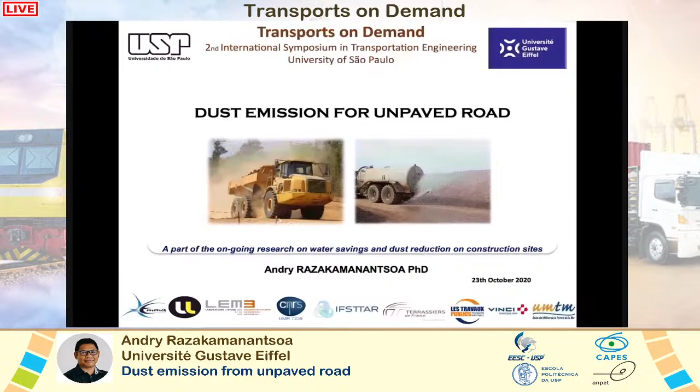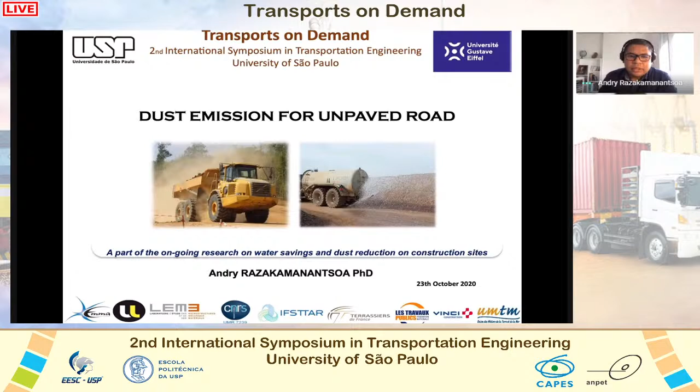As presented by Anna previously, I'm Andry Razakamanantsoa, a researcher in the laboratory team Geomaterials and Environmental Interactions of Université Gustave Eiffel. To begin my presentation, I would like to tell you shortly about our laboratory, and after I will come back to the topic, which is the subject of this presentation.

Our main topics are around earthworks, durability of earthen structure, and the interaction with the environment. In the context of global warming, the main question that we try to solve is about resource saving by using knowledge in terms of engineering geotechnics around the application, which is cities and territories.

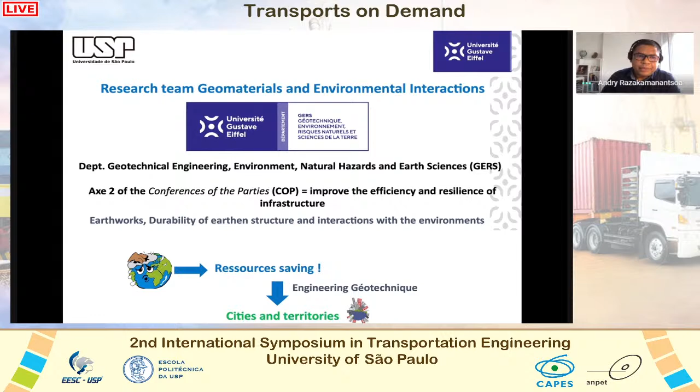The main topics of research of our laboratory are focused on interactions in geomaterials, where we try to develop new binders and to reuse materials, mineral and organic. With these aspects, we use porous media and coupling hydromechanical and chemical mechanisms as methods of study. About interactions of geomaterials with environment, we work mainly on geomaterials submitted to hydromechanical stress, and also interaction with atmosphere. For that, we use multiphysics coupling, solid mechanics, and fluid mechanics.

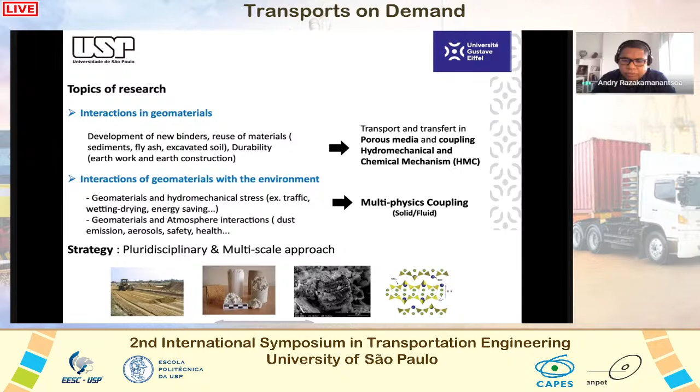Our strategy is that the main topics of research are studied using a pluridisciplinary and multi-scale approach, from molecular to field scale. Let's go back to the topic. I want to talk with you today about a part of the study that we have performed on the problematics related to dust emission. The first part of the presentation, which I will talk about for some minutes, is related to the geotechnical aspects of the dust emission and the link with the unpaved road.

The main context is about the need in the field. If we talk about earthwork applications, professional activities require the use of an important volume of water for different parts of the activities. But the activity which uses the main and most important water is dedicated to dust inhibition. Why dust inhibition? Because it can cause risk to the security and safety of workers during the activities.

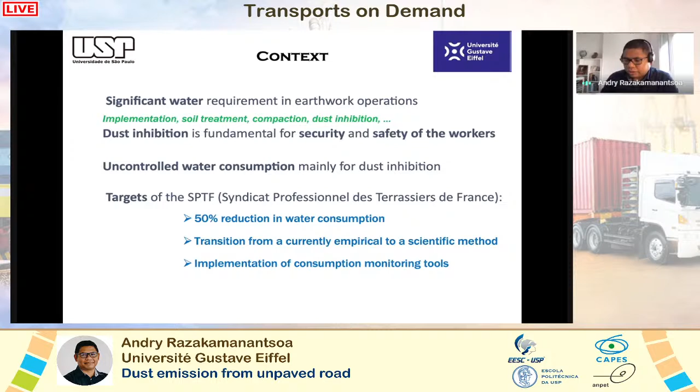But nowadays, the quantity of water used in the field is not controlled, and the target is to try to reduce water consumption and to use a scientific approach to develop different tools that can be provided to the profession. Many actions have been done and carried out by professionals in earthworks, but although all of these actions are good and interesting, they are not sufficient enough to reduce water consumption.

For example, consider 1 liter per cubic meter of moved soil. If we consider that we have 60 cubic meters per day for a current earthworks activity, then you can imagine the quantity of water consumed. But this is just an example. From now, there is no tool to help professionals in earthwork activities to control the use of water.

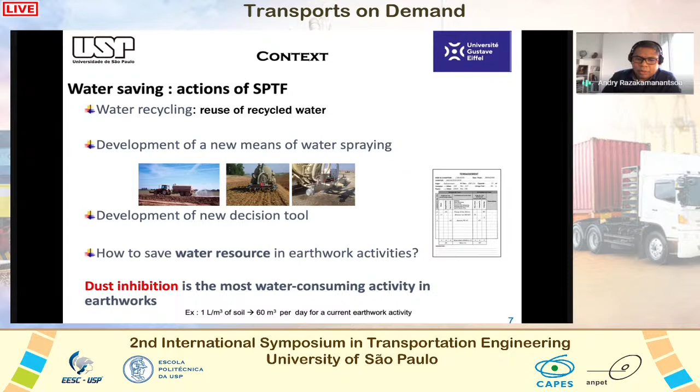So the problem is about dust inhibition. I would like to talk a little bit about the state of the art related to dust, because if we take into account the geotechnical definition, we don't have dust, but we can consider fine particles less than 80 micrometers that can be collected from the surface of soil. So if we consider this as dust, it can be produced during transport, traffic, mixing process, or soil treatment.

In terms of regulation, in France, many regulations are dedicated to sites like quarries, but it's not well clear for earth moving and mobile sites in terms of exposure.

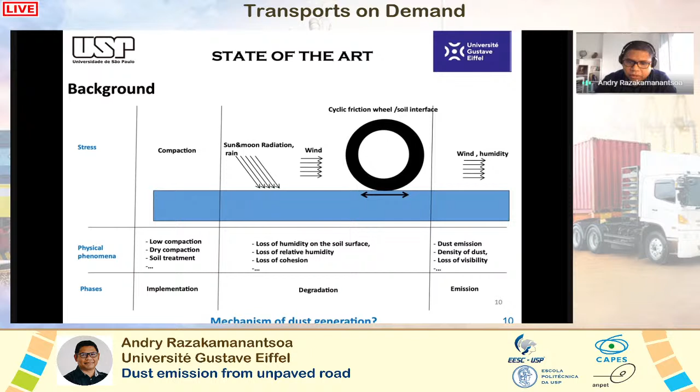If I make a kind of background about dust emission and try to identify the main sources for dust production, we can see that dust can come from compaction or from a cycle of traffic, or also due to environmental conditions like wind. But from actual knowledge, the mechanism of dust generation is not well clarified.

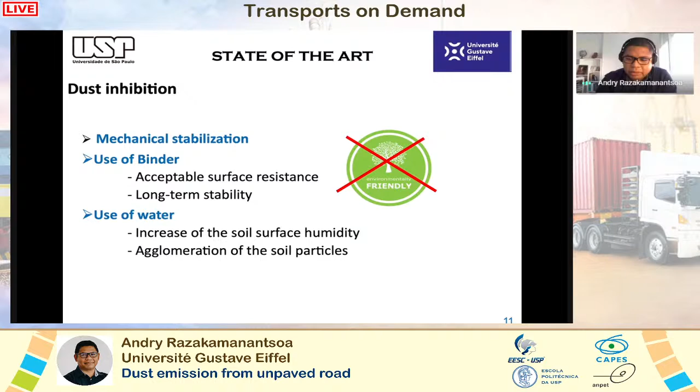How to inhibit dust emission? From now, there are many techniques, but we can summarize them in 3 points: mechanical stabilization, the use of additives like water or another chemical, or the use of binder. But the use of binder is not recommended because it's not environmentally friendly.

If I make a short summary of the main chemical products that can be used for soil treatment to reduce dust, we can see some examples considering the volume of traffic, the type of soil that can be encountered, and the climate during traffic.

We have many types of chemicals, but the problem is that they're almost not environmentally friendly, and they are also costly. So it's very expensive regarding the requirement. The cheaper option is water, but regarding the target to reduce water consumption and water resources, this also becomes a problem.

Let's talk about the scientific gap. Many scientific and technological gaps can be identified, but regarding dust emission, we have selected 3 points. The first is the reproduction of the mechanical stress governing dust generation at laboratory scale. After that, how about the dust initiation condition subjected to environmental parameters?

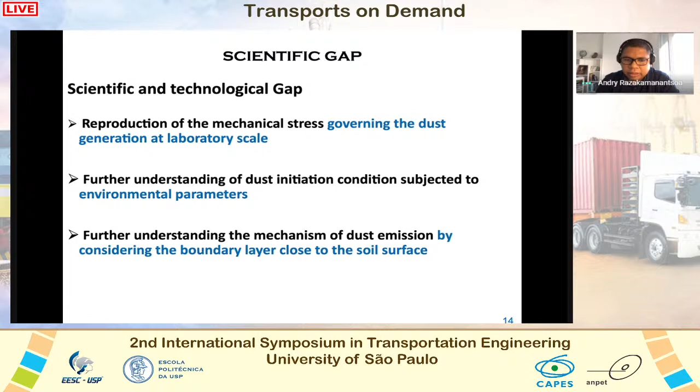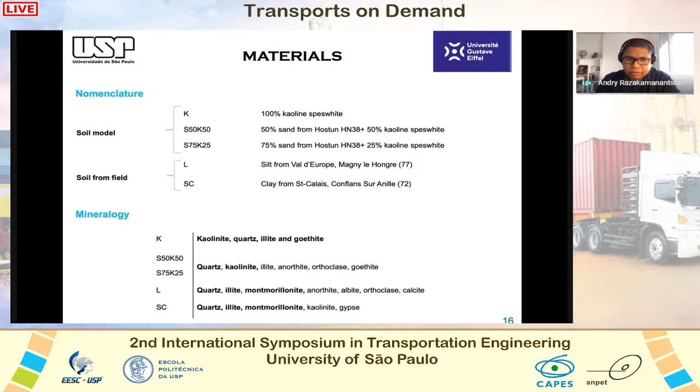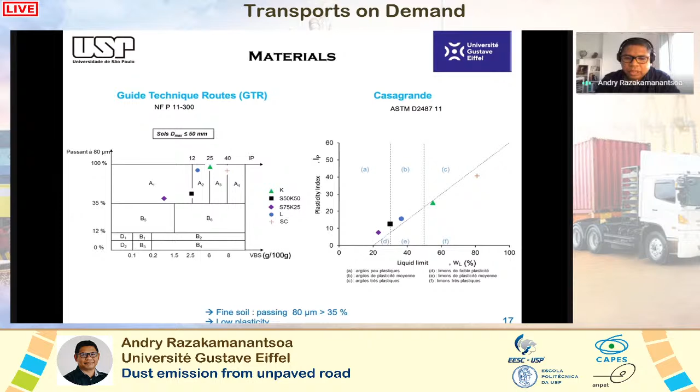The first point we try to highlight is about the source of dust generation. For that, we want to investigate a little bit the influence of stress tensor rotation provided by the roller compactor that we can encounter in the field.

From that, we will see how it's possible to apply and develop this kind of compaction at laboratory scale, and to compare it with the conventional one that we used to have in the lab.

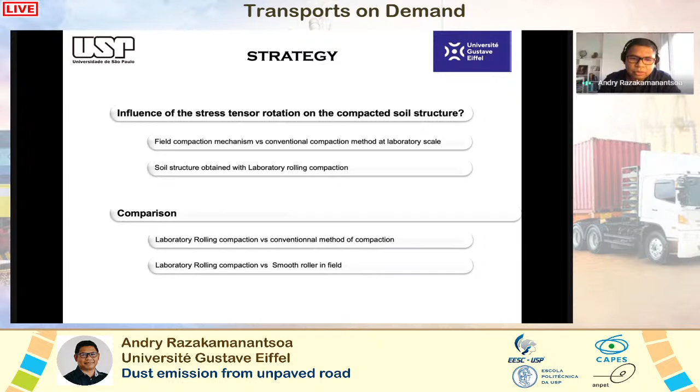As I said, when you consider a compactor, a smooth roller compactor for example, it applies a stress tensor rotation during compaction, and this enhances the settlement of the soil, giving you compaction at the end.

This stress tensor rotation is not easy to perform in the lab, because the conventional laboratory compaction you actually have is maybe with dynamic or static uniaxial compression. So the first question is how to reproduce this method, in order to understand further about the soil structure provided by this kind of compaction.

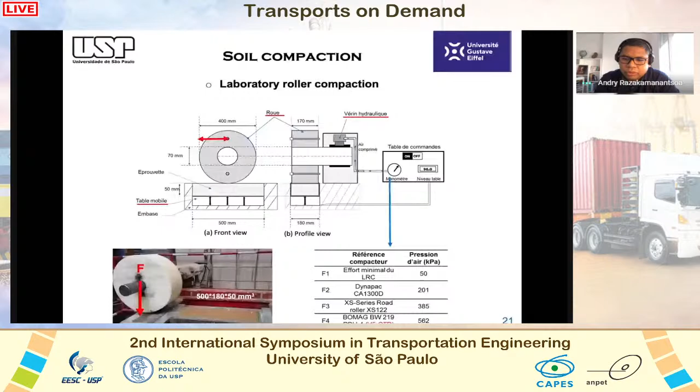So we developed a new method for our application, and we applied different levels of effort which correspond to the standard smooth roller that we can encounter in the field.

As a result, regarding the soil structure, the laboratory rolling compactor used allows us to provide a similar level of dry unit weight as the standard Proctor, but the difference occurs in terms of pore size distribution, where when we increase the compaction effort, the roller compaction allows us to decrease the macropore size around 10 micrometers, and obviously the volume of mercury that can be absorbed decreases.

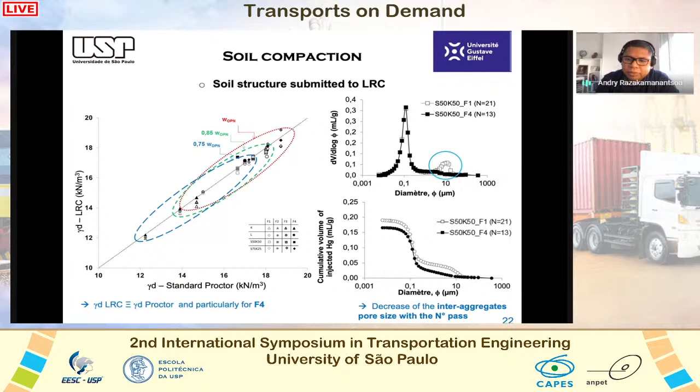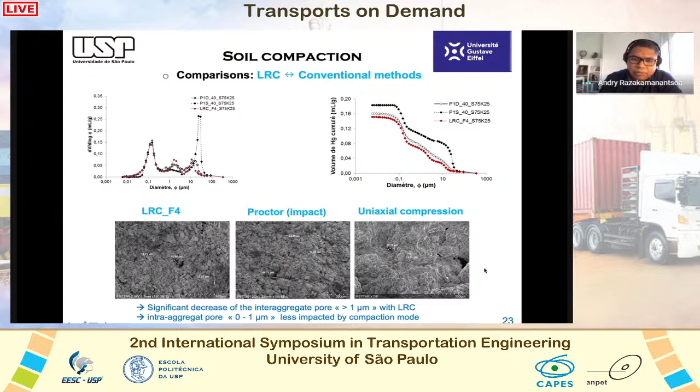If we compare the laboratory representativeness of the laboratory rolling compactor with the field, we can see on the left the pore size distribution from the same material from field and from lab, and they are similar. On the right you can see that the field smooth roller allows absorption of a higher volume of mercury, meaning we have a finer, more important pore structure in the field obtained with the field smooth roller.

If we take a look at the SEM images, we can see that effectively with a smooth roller we have a more well-organized structure, which is favorable for the development of smaller pores.

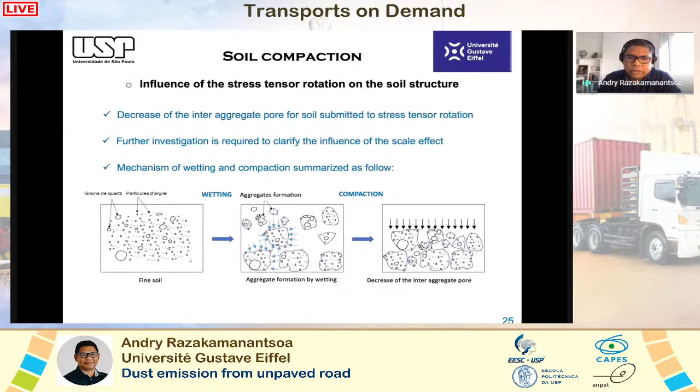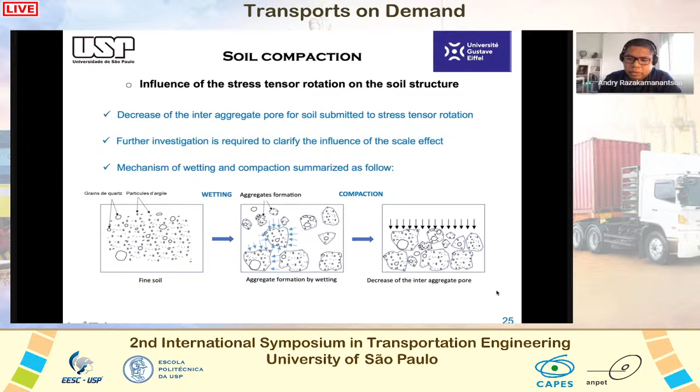To summarize what we've obtained about compaction: all types of compaction reduce interaggregate pores from soil submitted to stress tensor rotation. Another important finding is that aggregate formation is obtained during wetting, and compaction only decreases the macropore size without touching the micropore size that is inside the aggregate.

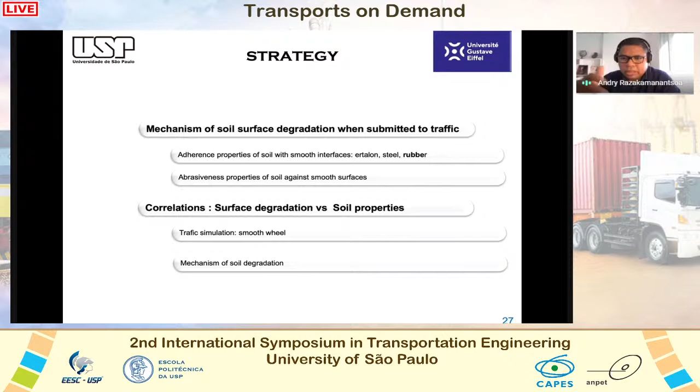Let's talk about the next step, now that we understand more about compaction: the interaction between the compacted soil and the wheel during a traffic simulation, for example. We'll talk a bit about the adherence and abrasiveness properties of soil against different types of interfaces, mainly rubber, because during traffic the soil is in permanent contact with rubber.

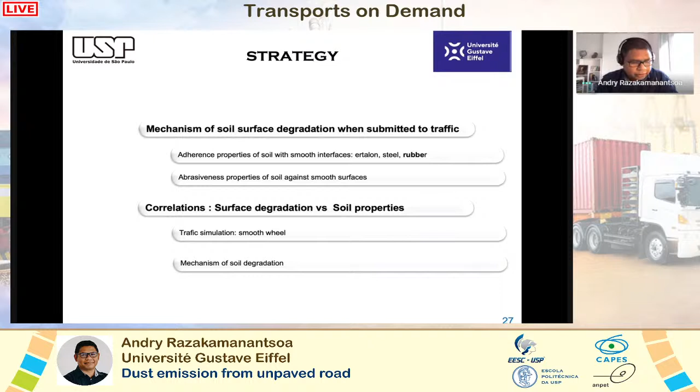After that, we will try to see if we can find a correlation between surface degradation and soil properties. Let's talk about the adherence and the abrasiveness.

For that, we did a unidirectional shear box test, and we changed the interfaces. The first model uses soil-to-soil interfaces, which commonly gives us a cohesion and a friction angle.

After that we changed the interface, using rubber, steel, and Ertalon to have different types of interfaces. What you have in terms of adherence is the ratio between the cohesion with the interface and the cohesion with soil. If the ratio is more than 1, the adherence is more important. With this type of soil, we have higher adherence.

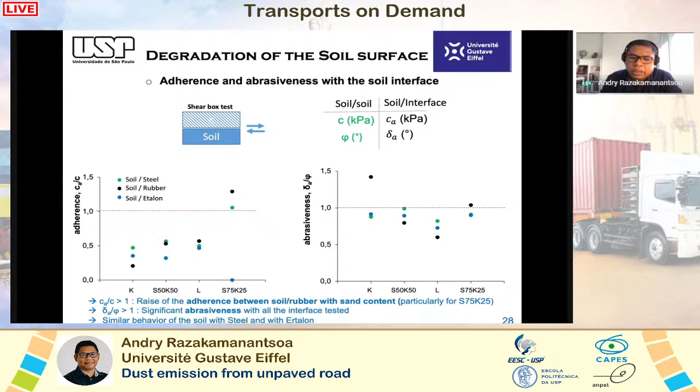If we look at the type of soil, the more we increase the sand content, the higher the adherence—that's obvious. In terms of abrasiveness, all of the soils show an abrasiveness level close to 1, meaning all configurations tested can be degraded more or less by contact with rubber.

After that, we tried to simulate a traffic cycle at laboratory scale. For that, we compacted a parallelepipedic specimen and applied different cycles with a smooth roller. We measured settlement, collected particles resulting from traffic, and performed grain size distribution analysis.

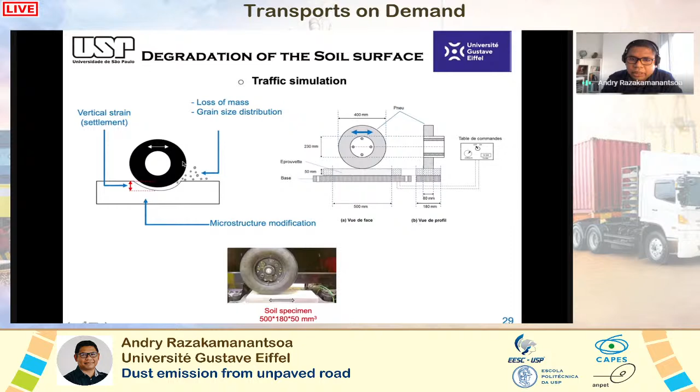We also did SEM observation. What we see is that the grains collected after a cycle of traffic are mainly composed of aggregates. Applying different series of traffic cycles, we observe that at the beginning we have a very important aggregate size, and this size decreases as the number of traffic cycles increases.

This means that the abrasion between the rubber of the wheel and the soil increases with time and number of cycles. We developed a degradation index for this.

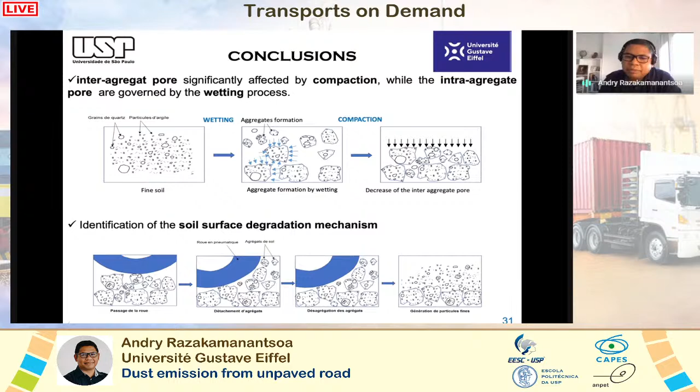As a conclusion regarding compaction: wetting allowed the creation of aggregates, and compaction allowed diminishing the space between aggregates without touching the micropores inside the aggregate. Regarding the soil surface degradation mechanism: at the beginning you segregate the surface of the soil, removing aggregates, and with time the aggregate size decreases until you have fine particles. This is the first step of the study.

What we concluded: first, we need to investigate more about the influence of wheel print on soil surface destruction, and also take into account hydromechanical properties related to soil drainage during humidification, wetting and drying paths. From now, we will also try to draft a technical guide regarding implementation and soil degradation to help professionals in terms of water saving.

So in the overall view, this study, the following steps of the study is to try to take into account the problem of health, which is linked in terms of PM, particle matter emission, and to try to prevent some health problems related to dust emission.

So this project is ongoing since it began in 2012 until now. We have had 2 PhD students and several masters students. We have international patents and scientific papers, and a guide in preparation.

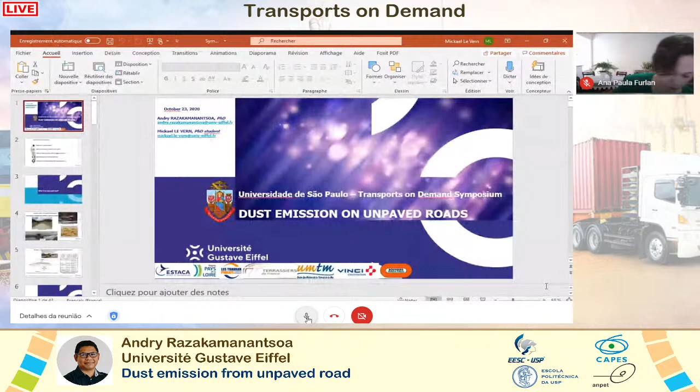I will present the second part. I hope you can see my screen. Hi everybody, I'm Mickael Le Vern. I am a PhD student working with Andry Razakamanantsoa, and I will present the atmospheric and soil interface interaction.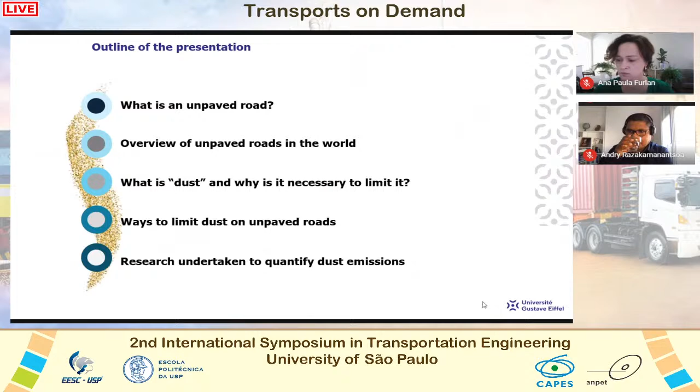First of all, I will broaden the topic of unpaved roads, and after that I will focus on our recent research undertaken in our lab on the problem. So I will speak about dust, and I will take an overview of unpaved roads in the world.

So what is an unpaved road? Andry spoke about that. An unpaved road is a road with no surface coating layer. There is no asphalt, no bituminous material on the surface. So the vehicles circulate on the aggregates.

These roads are not paved for economic or practical reasons. For economic reasons, for example, low volume roads don't have enough vehicles circulating on the surface to make it viable to put a bituminous layer on the surface. Also, for practical reasons, for example in mines or construction sites, these roads are temporary, so we don't put asphalt layers on temporary roads.

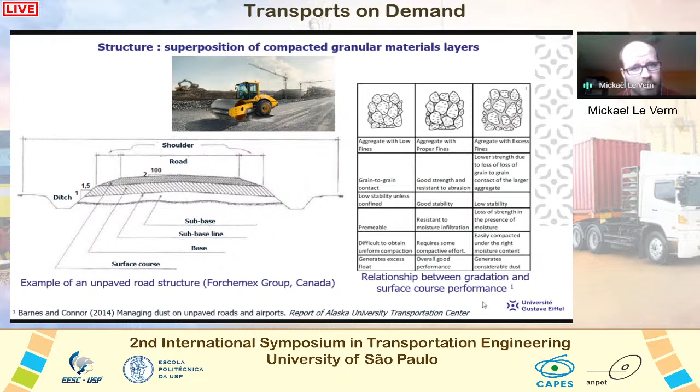So what is an unpaved road? It's a superposition of compacted granular material layers, and vehicles circulate on the surface course. The surface course is made of a mix of aggregates and fine particles. If you have too many aggregates, you cannot compact the road, so it's not good. If you have too many fines, you have a problem of stability and too much dust generated. So you have to have a good gradation of the surface course.

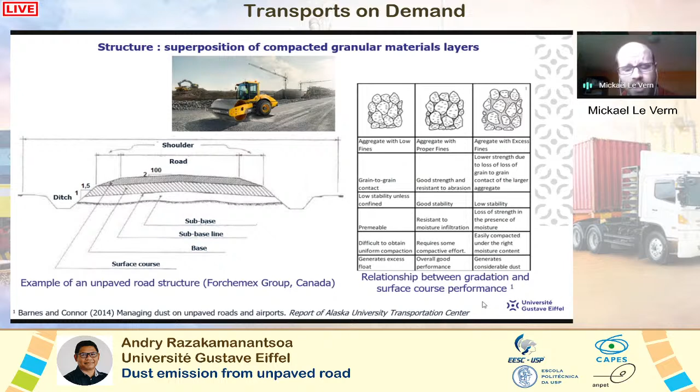Many of these roads will be built to connect communities and also to provide access to valuable resources such as timber or minerals, and many of the roads being built are unpaved, particularly to provide access to resources. So here I present the 6 countries all around the world with the largest road networks.

First of all, it's the US, where 37% of roads are unpaved. It's the same amount in India. In Brazil, your country, 89% of the roads are unpaved - it's a very large amount, a very important topic in Brazil. And also in Canada, 60% of the roads are unpaved.

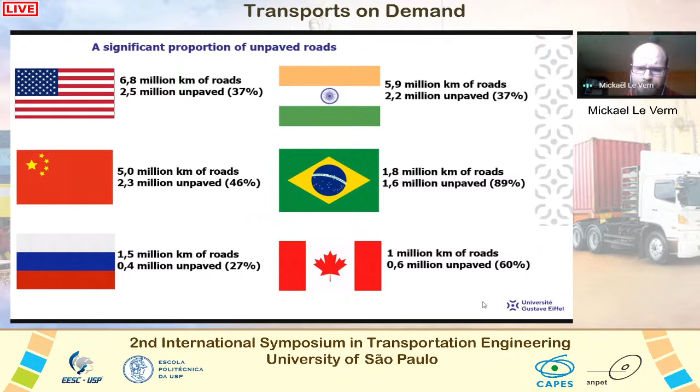So these roads generate a lot of dust. So what is dust and why is it necessary to limit it? Dust - we can find a lot of particles in the atmosphere, and dust particles are the fine solid particles remaining suspended in the atmosphere that can be transported by the wind.

Unpaved road emissions are in the range of fugitive dust, which are coarse particles. Coarse particles are between 2.5 and 10 micrometers. We can see on the right the comparison of the size of the particle with a human hair.

A human hair is almost 50 to 70 micrometers in diameter. We can see the particle of 10 micrometers, the blue one, and the 2.5 micrometer, the red one - very fine particles. And we are taking into account not the real diameter of the particle, but the aerodynamic diameter. You can see here a definition.

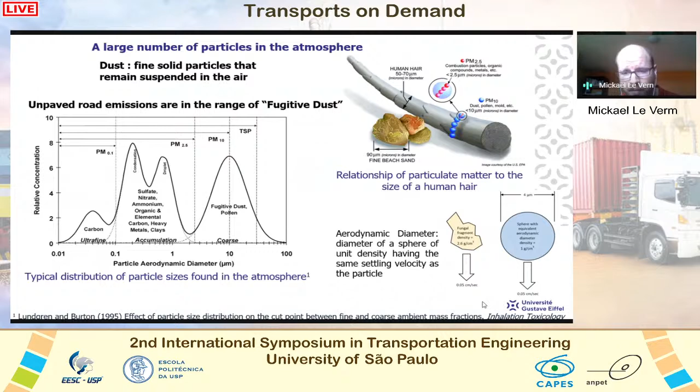Aerodynamic diameter is the diameter of a sphere of unit density having the same settling velocity as the particle. That's the definition used in the literature we are considering.

Where do suspended particles come from? They come from many areas, particularly combustion of wood, combustion of oil in engines, exhaust of diesel engines, and also dust on unpaved roads and construction areas, which are mainly coarse particles, between 2.5 and 10 micrometers or above 10 micrometers.

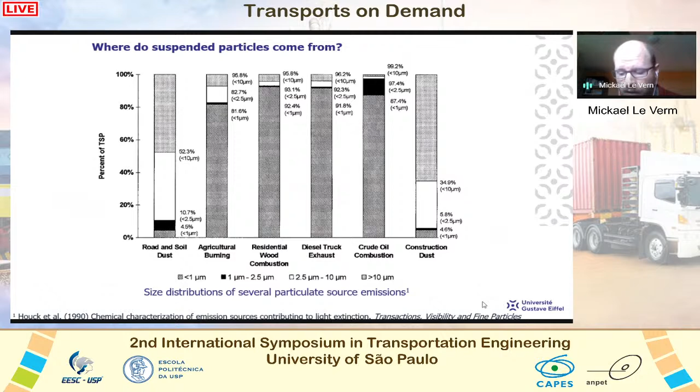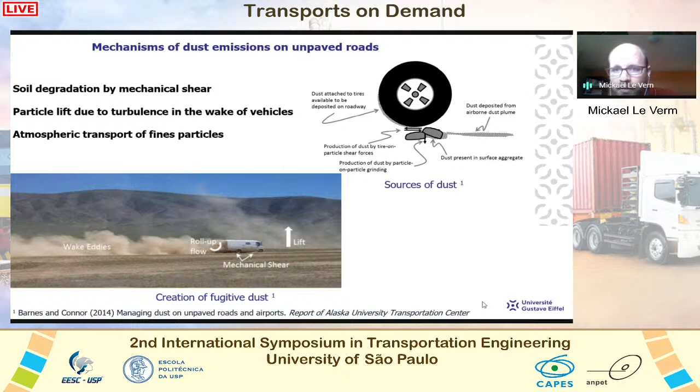What are the mechanisms of dust emission on unpaved roads? Andry spoke about it: it's soil degradation by mechanical shear at the tire-surface interface. Particles are lifted due to the mechanical shear, but also due to the turbulence in the wake of vehicles, the eddies generated by vehicles circulating on the road. Particles are then transported by atmospheric turbulence, by the wind.

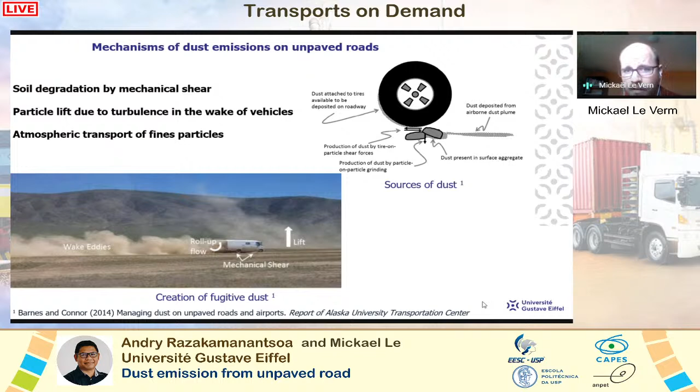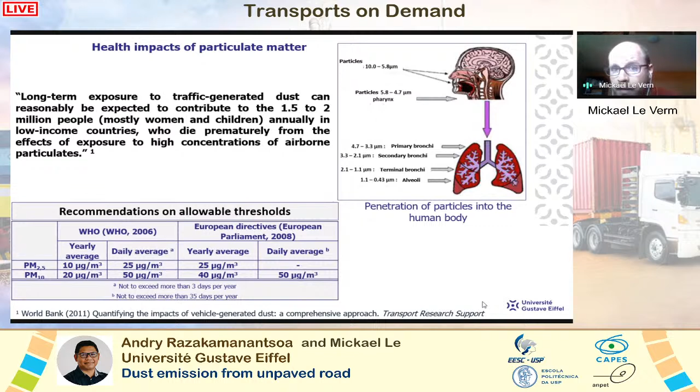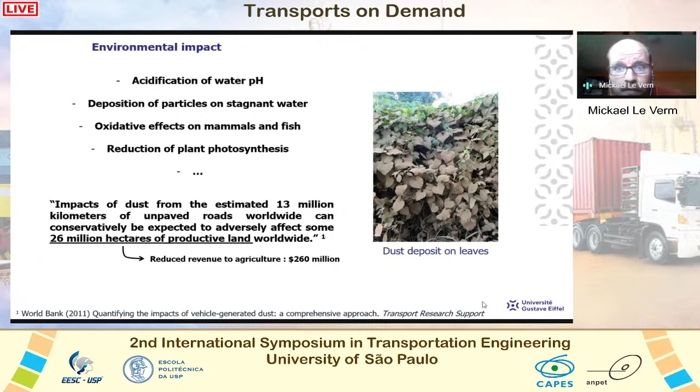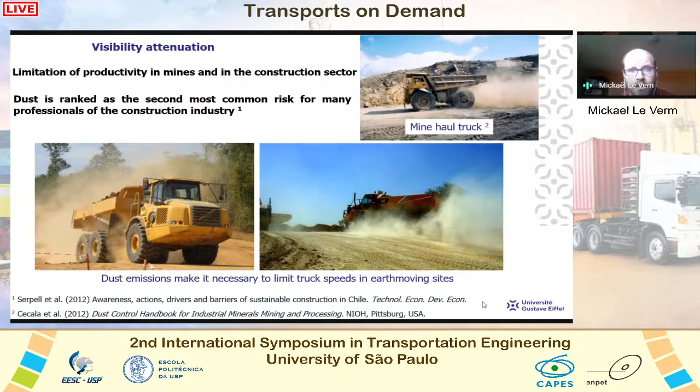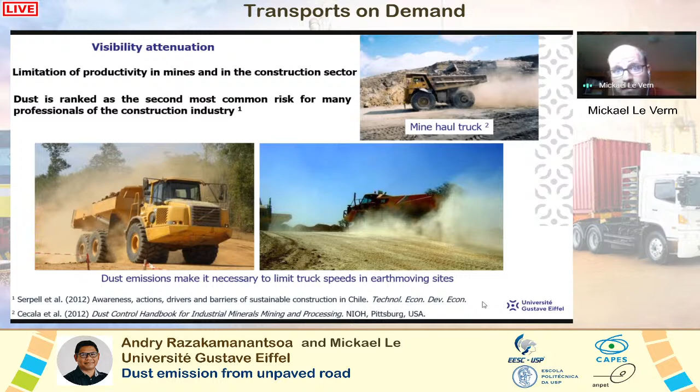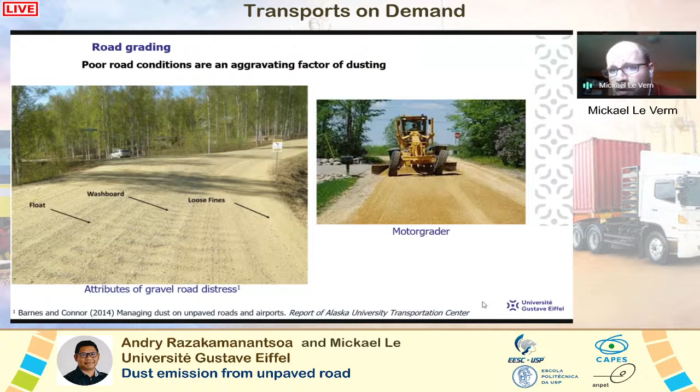So what are the means at our disposal to limit dust on unpaved roads? First of all, we can have a good gradation of the surface course, a good mix between big particles and small particles, aggregates and fine particles, and grade the surface with, for example, a motor grader. It's very important to pass very often with a motor grader.

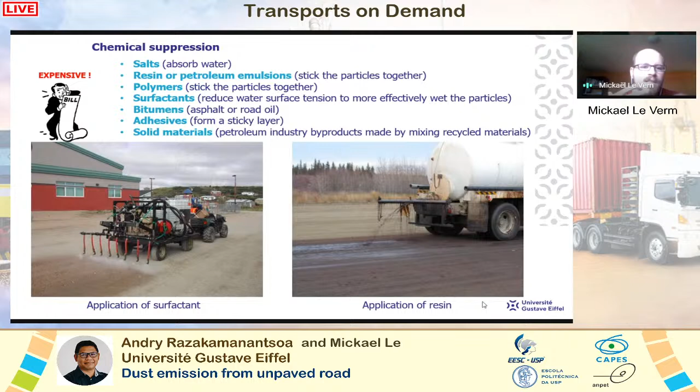We can also use chemical suppression, as Andry spoke about. You can use some salts, some resin, some bituminous material to apply on the surface. It's a good solution, it's effective, but it's very expensive and it's not good for the environment, so it's not a very good solution.

The most common way to limit dust around the world is water, as we spoke about. It's a resource-intensive solution, especially nowadays with climate change and all the problems with water and precipitation, so it's a problem, especially on construction sites.

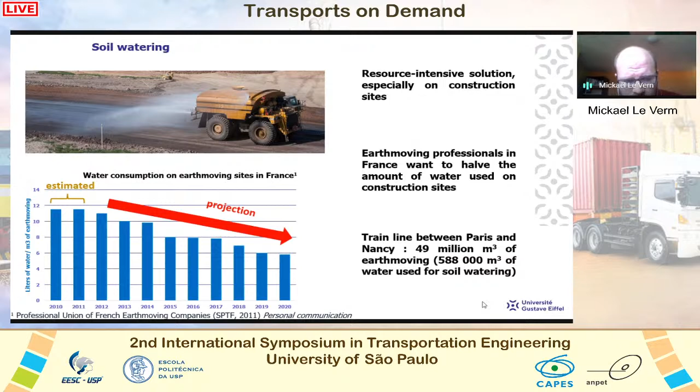Here's an example of the problem in France, in the earth-moving profession. They want to halve the amount of water used on construction sites. As Andry spoke about, the amount of water was around 12 liters of water per cubic meter of earth moving, since earth-moving sites are quantified in volume, the volume of material moved.

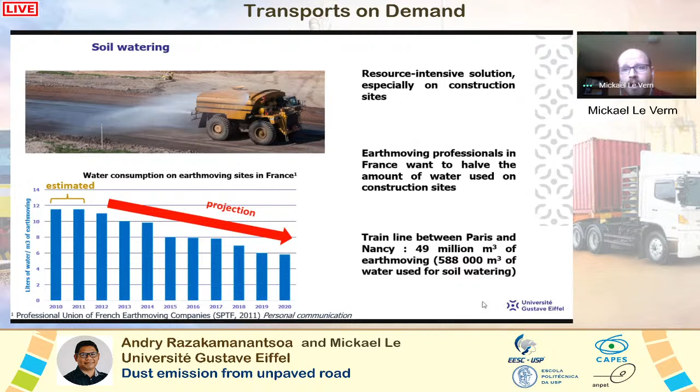For example, I'll give you one order of magnitude. One earthwork project, a train line between two cities in France, Paris and Nancy, involved around 49 million cubic meters of earth moving, and it represents 588,000 cubic meters of water applied on the soil to limit dust. So it's a large amount of water. It's a problem: dust emission and water use are problematic, so we need to undertake research on this.

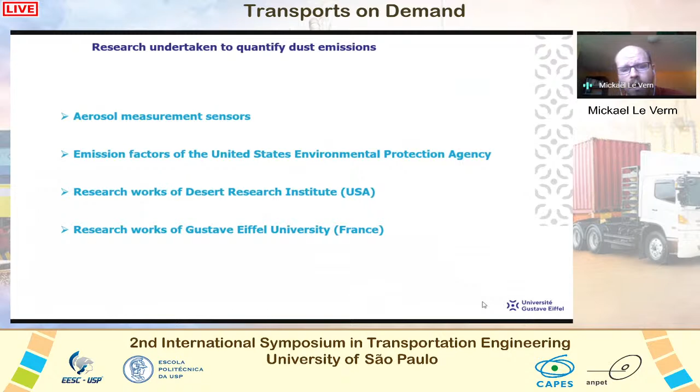Here I will present the device, the apparatus at our disposal to study dust emission. I will then present the state of the art, the emission factors of the United States Environmental Protection Agency, very common factors used worldwide but with limitations needing further research. I will also present the research of the Desert Research Institute in the US, and the work we are undertaking at Université Gustave Eiffel.

The first and most commonly used apparatus to measure dust emission is the high volume sampler. It's a pump: you suck the air with particles, the particle comes through the apparatus, and we need to select the size of the particle we want to measure. We can do that with a cascade impactor or a cyclone. With a cascade impactor, you separate particles according to their inertia and select the ones you want to measure. With a cyclone it's the same, but using centrifugal force. So you select the particle you want to measure and collect it in a filter.

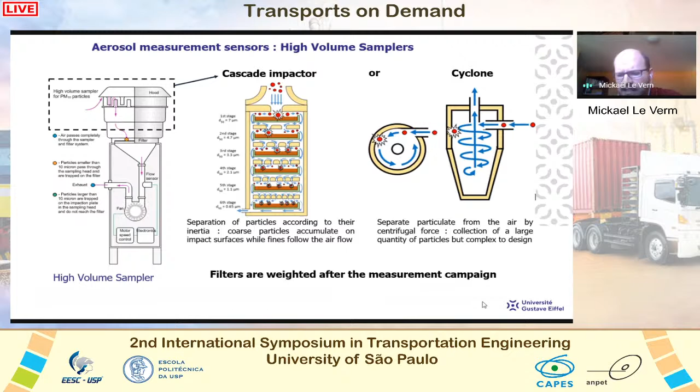After the filter, the particles are weighed after the measurement campaign, so you can get an estimation of the dust emission over a long period of time. But these measurements are not real-time. For real-time measurement, we use apparatus called spectrometers.

How does it work? The air is sucked into the apparatus with a pump, and the particles enter a measuring chamber where they pass through an electromagnetic wave, typically a laser beam. When the particle comes through the laser, there is a scattering of the light. We measure the scattering angle, which is related to the particle diameter. So we can estimate the size of the particle, and by estimating their density, we can measure their mass and estimate in real time the concentration of particles raised into suspension, in micrograms per cubic meter.

All of these apparatus are used worldwide, particularly in the US, to establish national ambient air quality standards. For these standards, there is a need to quantify national pollutant emissions, particularly dust emission. So for particulate emissions on unpaved roads, in the US they conducted measurement campaigns in the 70s, 80s, and 90s, and established two formulas: one to assess emissions on unpaved surfaces at industrial sites, and one for publicly accessible unpaved roads.

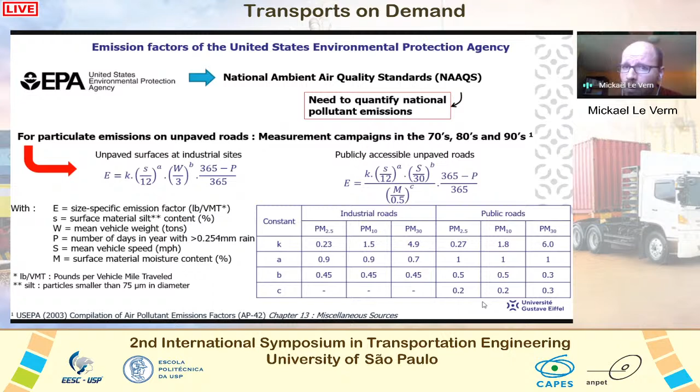You can see these formulas are purely empirical, with many factors depending on the type of particle and the type of road. But they are very commonly used worldwide. It's the state of the art, but it's purely empirical factors and formulas.

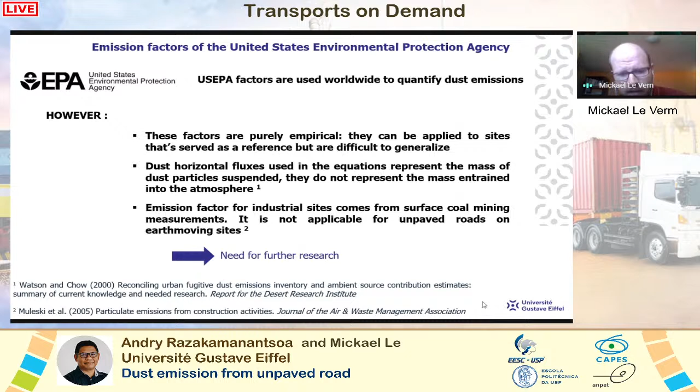So there are many limitations with these factors. They cannot be generalized around the world. For example, the dust quantified in these emissions represents horizontal flux with suspended particles, but not entrained particles, because there is a difference: big particles settle and will not be entrained into the atmosphere, so it's important to take that into account. Also, the emission factors for industrial sites come from surface coal mining measurements, which is not applicable to our field of research: environmental earth moving sites. So there is a need for further research.

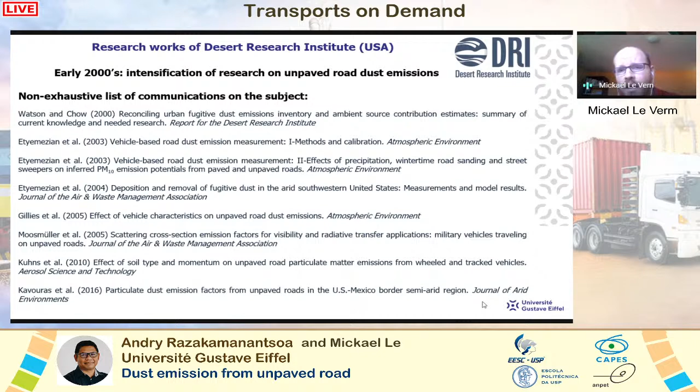In the early 21st century, the Desert Research Institute undertook a lot of research on this topic. Here is a non-exhaustive list of communications on the subject; if you are interested you can read these articles, there are a large number of them. I will just present some of the developments of the Desert Research Institute.

What are the main findings of these researchers? First of all, dust emission directly behind the tires is related to the cube of the vehicle speed. So when you double the vehicle speed, you don't double the dust emission, you multiply it by 8. Very important to know that. Also, dust emission flux is linearly dependent on vehicle momentum, the speed times the weight of the vehicle.

Dust emission is also seasonally dependent. It's important to take into account meteorological conditions, which we try to do in our lab. There's also a lack of knowledge about dust dispersion, so further research is needed in this area, including the wake turbulence issues, the dust emission and dispersion by the flow generated in the wake of the circulating vehicle. This is not well quantified for the moment.

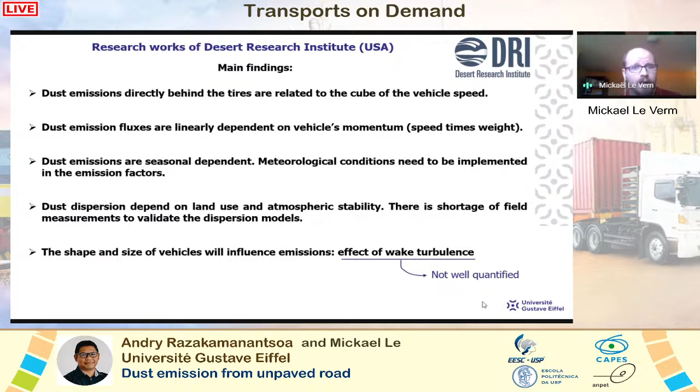That's why we at Université Gustave Eiffel are working on this topic. Andry already presented the university to you, so I'll be quick here. We have 3 main research areas.

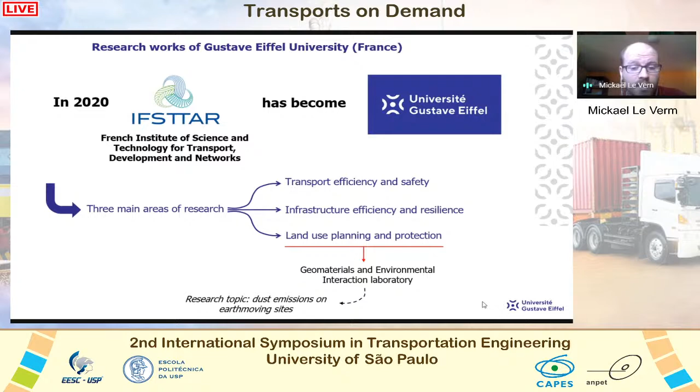We work on land use planning and protection, particularly on dust emission on earth moving sites, which we presented to you. The problem is that there is a lot of dust emission from truck circulation on unpaved roads, requiring intensive watering to limit dust emission. We think water savings could be achieved with a better knowledge and comprehension of the mechanisms and conditions of dust emission.

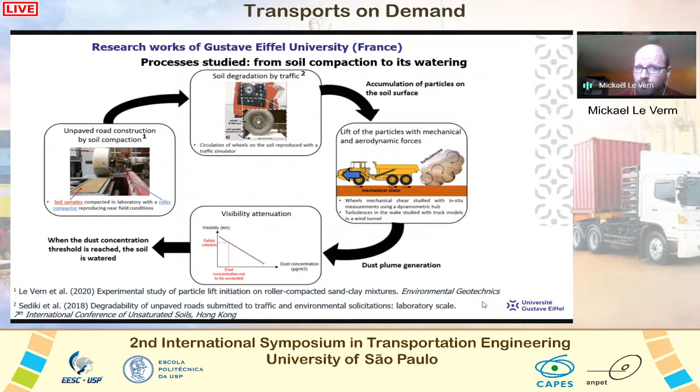So that's why we're undertaking this research. We are studying the mechanism of dust emission, from soil compaction, which we told you about, to its watering.

We work first at the laboratory scale. We compact soil samples in the laboratory with a roller compactor to reproduce field conditions of compaction of soil on unpaved roads. In the second step, we degrade the soil using a wheel in a traffic simulator.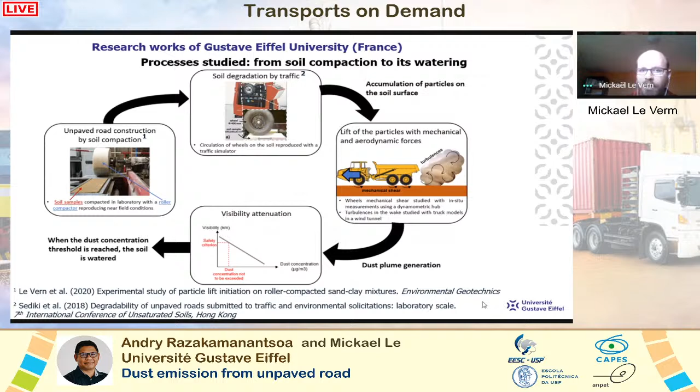We're interested in the accumulation of particles on the soil surface. In the third part, we study the lift of particles due to mechanical shear and aerodynamic forces, typically the turbulence in the wake of trucks circulating on unpaved roads. This generates a dust plume, which causes visibility attenuation. We established a safety criterion to know the dust concentration not to be exceeded, and that's when the soil should be watered before visibility attenuation occurs.

Andry presented the device we use in our lab, simulating a wheel's pass above compacted soil, using different types of tires. You can see the soil samples after thousands of wheel passes. We're interested in the soil surface degradation as a function of the number of wheel passes - this degradation being the mass of particles torn off by the tire per unit surface area.

The blue curve is the grain size distribution of the initial soil, a clay sand. We weigh the particles, compact them, put them on the traffic simulator, and simulate thousands of wheel passes. After 2,000 wheel passes, we measure the grain size distribution, establishing the yellow curve. After 10,000 passes, we measure the pink curve. After 20,000 passes, we have the green curve. So you can see the evolution of the grain size distribution as a function of the number of wheel passes.

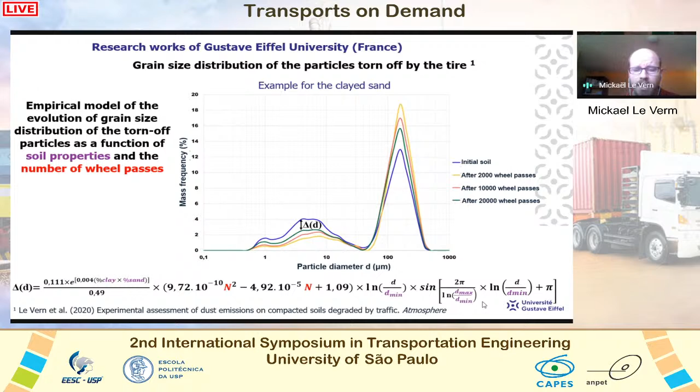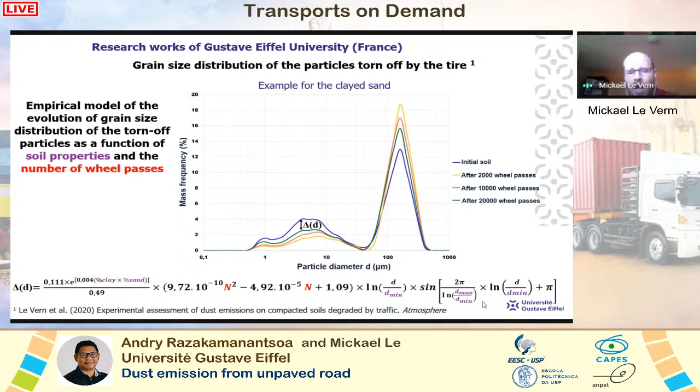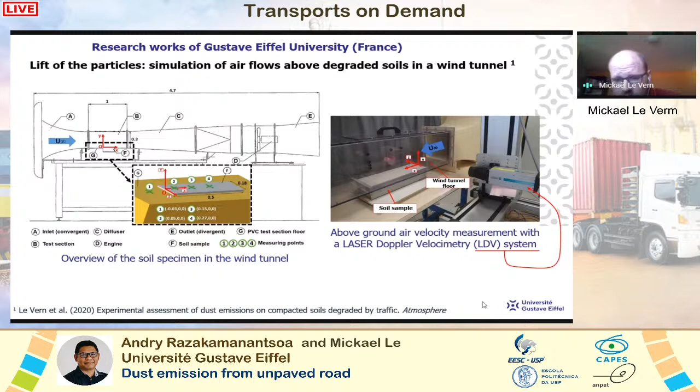So the particles accumulate onto the soil surface, and we study the lift of the particle. We work in a wind tunnel. We simulate airflow above our soils, or compacted soil degraded by the tires. And we measure, with the device on the right, the flow velocity above the soil.

We can establish some results, some dust emission flux. It's a parameter phi, in kilograms per square meter per second, for our 3 different soils and for 2 flow velocities, 8 meters per second and 16 meters per second, simulating the wind tunnel. And we work with 3 different numbers of wheel passes, n equal 100, 1000, or 10,000 wheel passes. What we see here, be careful, the scale is logarithmic.

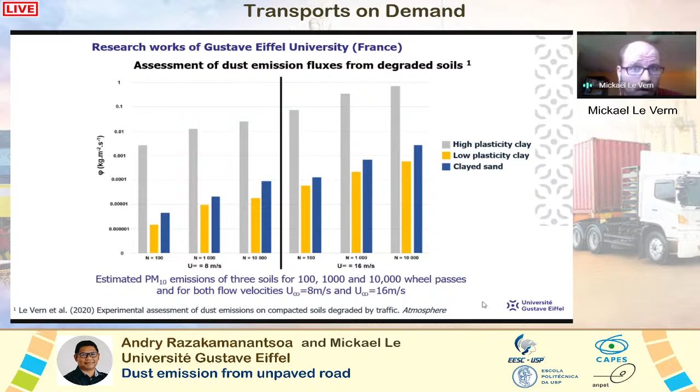We can see that the high plasticity clay has dust emission many orders of magnitude above the other soils. Also, when we double the flow velocity, we multiply the dust emission by 30. It is not a linear phenomenon.

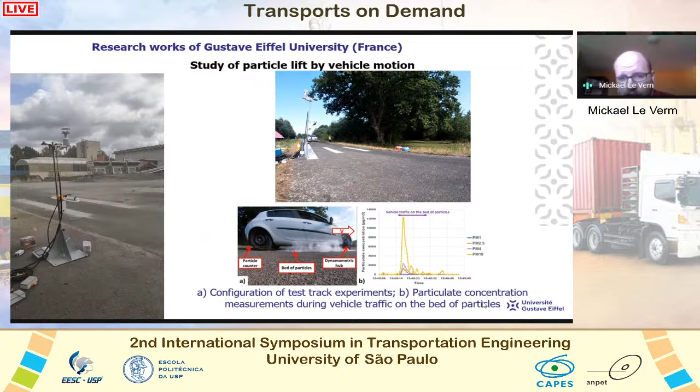So we work in the laboratory, in the wind tunnel, but we also work in test tracks. Here I present you some experiments we are doing. For example, we made circulations of trucks on the particles, and we are measuring environmental conditions, the dust emission, and the visibility attenuation. We do that also with passenger cars, and we measure the dust plume. That's what we are doing in Université Gustave Eiffel.

And we are also working recently on a wind tunnel with a new device. We are working on the wake of the flow, in the wake of the construction trucks, with scale models of 2 different types of trucks.

What you can see on the top right corner is the scale model of a truck in the wind tunnel, and we see the rear of the trailer. What we are seeing here is the turbulence generated by the circulation of the truck. And you can imagine the dust particle being trapped and being transported by these eddies.

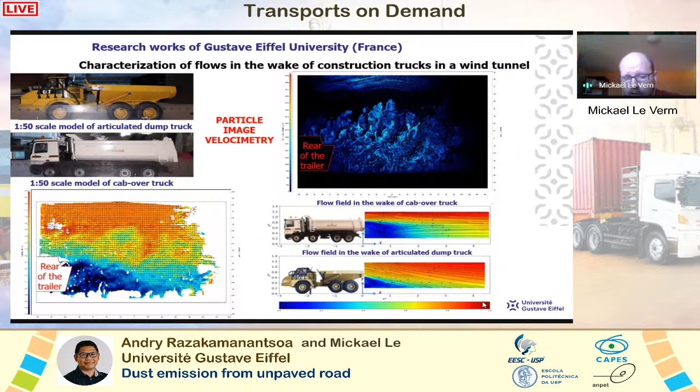With particle image velocimetry algorithm, we can know the flow velocity. On the bottom right corner, we can have the flow velocity in real time. So we can assess the dust emission induced by the vehicle. You can see the average flow velocity behind the 2 trucks. It's quite different, so it's interesting to work on this topic.

The problem of unpaved roads is a very huge problem in the world. Many unpaved roads exist in the world and will be constructed in the years to come, particularly in Brazil, and it's a very important topic. A lot of problems come with unpaved roads, and among these problems, dust emission is one of the major ones because of health, environmental, and safety issues.

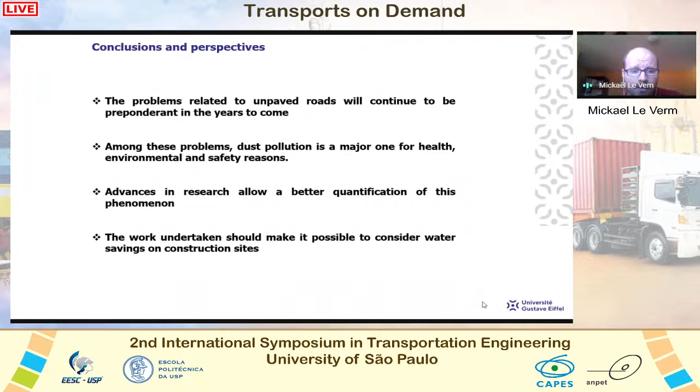So there is a need for research in this topic, and advances in knowledge allow a better quantification of this phenomenon. At Université Gustave Eiffel, we are particularly interested in research to make it possible to consider water savings, particularly on construction sites. So I thank you for your attention, and if you have any question, we will be glad to answer it.

Okay, sorry. I'm here now, I'm back.

Thank you, guys, Andry and Mickael, for your very nice presentation. It was really impressive, and it reminds me about the essential engineering commitment with the economic and social development, you know. So congratulations, Andry and Mickael.

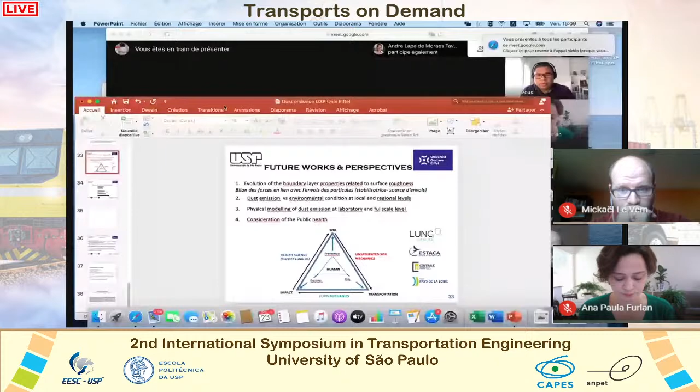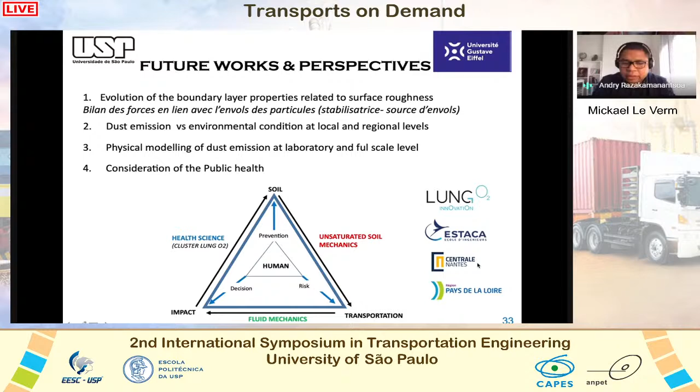To answer this interesting question, our attempt is now to make a link between dust emission and the impact on health in terms of particle matter. For that, we are involved in the cluster Lung O2, Lung Innovation, which you can check on the internet. Since several months, we are involved in an option with École Centrale Nantes regarding the link between environment and health, trying to make a link between particle matter emission and the pathologic agent which can be involved in this particle. As you know, the main well-known problem now is related to COVID, and in this aspect we work essentially in terms of aerosol emission, trying to make a link between aerosol emission and the pathologic agent. I don't know if it's okay to answer this question.

I think so. I'll complement this question. I would like to ask you, Andry, if possible, could you talk a little bit more about your Saving Water project for dust emission reduction from unpaved roads?

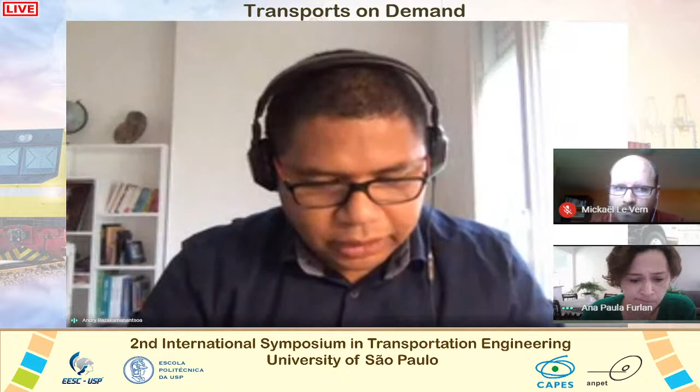This project was initiated since 2012. The main question was to reduce water consumption. By analyzing the problem, since we are geomechanicians, we are more useful to work on geomechanics. So finally we identified a problem related to geotechniques, which is the dust emission, and finally it's a problem of shear strength between the surface and the traffic.

From that, we have developed different tools, and we have two patents related to the measurement of soil degradation and environmental impact, because there was no more devices which allow us to make a physical modeling of the impact of environment on unpaved road and the evolution of behavior of unpaved road submitted to the traffic, considering at the same time the dust emission.

The next aspect that we have developed also is regarding the lack of tools to qualify and quantify the ability of soil to generate dust. We have done a very interesting job in this aspect too, and we have a patent for that. After these patents, we now have two PhD studies, the actual PhD of Mickael and the previous one, which is mainly geotechnical aspects.